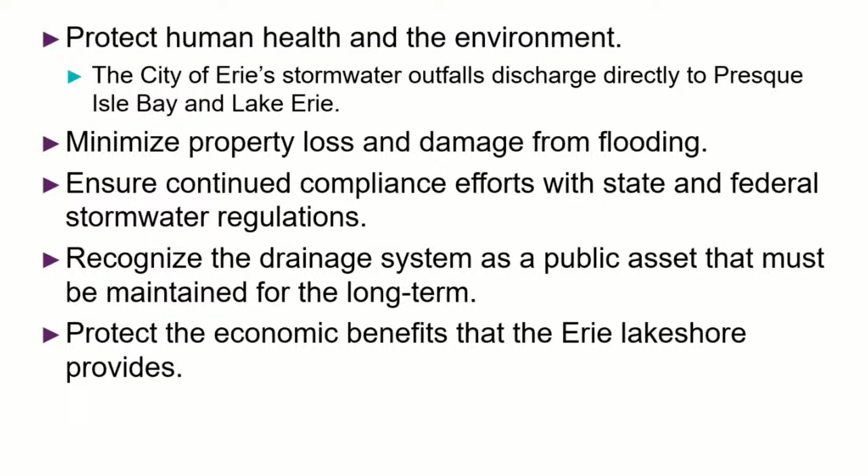Next - the big question we often get is, why now? What is driving the change at this particular stage of the game? There are really three points I want to make here. One is aging stormwater infrastructure.

The city manages a vast network of underground stormwater pipes - about 500 miles of stormwater pipes just in the City of Erie. If you put that end to end, you'd have a pipe stretching all the way from Erie, Pennsylvania to Knoxville, Tennessee. So it's pretty big. Not unlike a lot of other cities, Erie's system is aging - parts of it are over 100 years old. Even really good modern corrugated or reinforced concrete will only last about 100 years if properly maintained, so you've got a lot of infrastructure that is pretty old.

You have capacity issues, and so pipes that were built 100 years ago, 50 years ago, before good stormwater management, were typically smaller and not widened as additional development came on. So what happens is the stormwater backs up and causes upstream flooding, and deferred maintenance costs are more in the long term.

I wanted to highlight this briefly because it's a very important point, which is that managing by emergency is a lot more expensive than rehabilitating and fixing the system before a collapse occurs. Fairfax County, Virginia actually did a long study to look at the cost of maintenance over time versus the cost of what happens if something collapses. They found it was about 7 times more expensive to take care of something after it's collapsed. We validated those numbers with city staff using some recent projects and experiences, and the numbers were very similar.

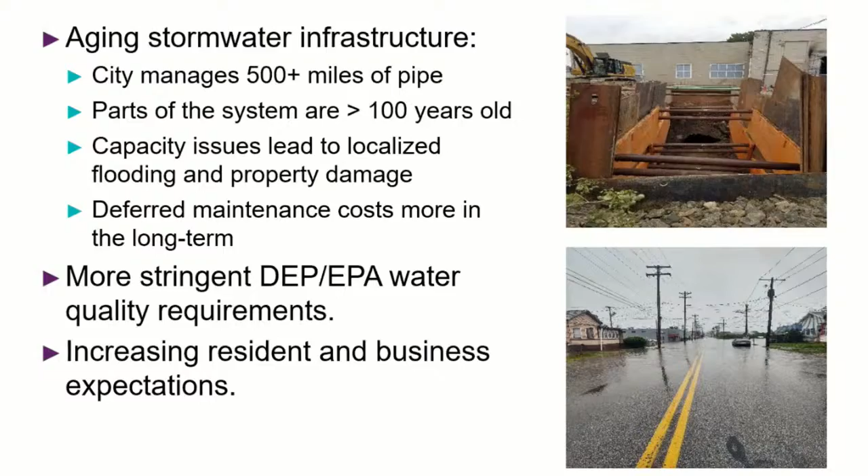More stringent DEP and EPA stormwater requirements - I'll talk about that a little more. And then also just increasing public expectations, both residents and businesses, with respect to not wanting to deal with spot flooding and stuff like that, and also in terms of the quality of the water in our local streams.

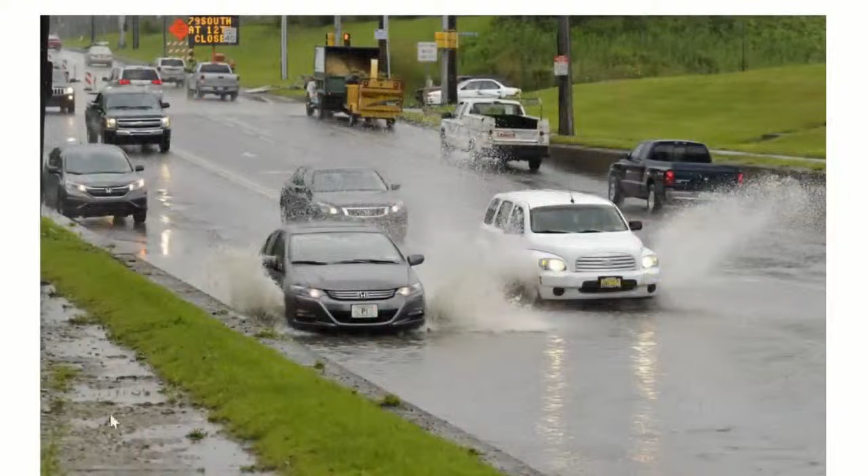So these are just a couple of examples here for Erie. This is road flooding caused by undersized infrastructure. This is West 12th Street - that's the kind of nuisance flooding you see that results from undersized infrastructure.

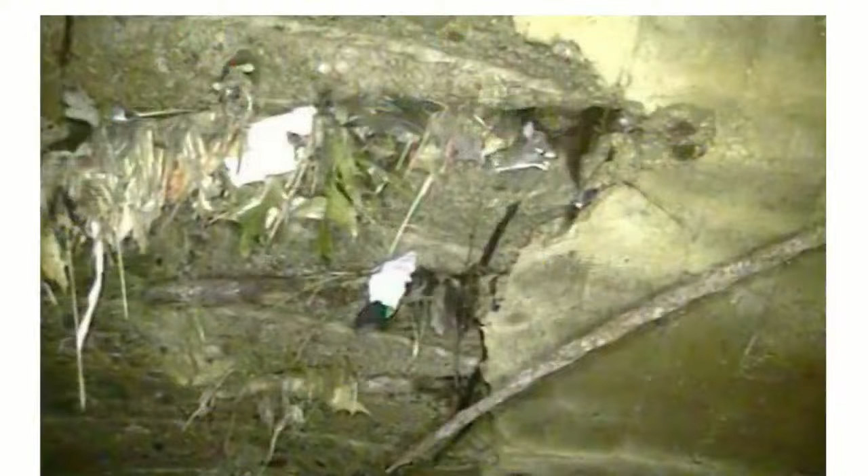This is a closed circuit television shot of deteriorated underground pipes under Myrtle Street. That's a great example - if you catch something like that early, it's relatively inexpensive to fix. If you wait for it to collapse, it's going to be a lot more expensive to fix.

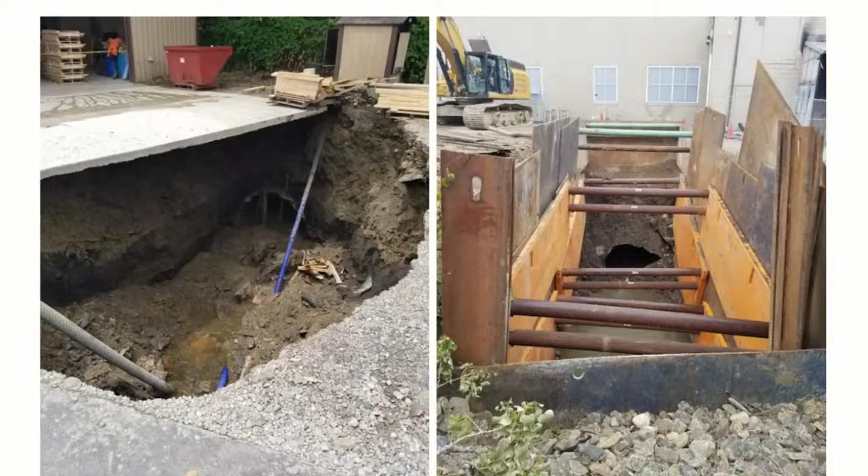So this is where you did have to deal with a collapsed structure, and of course that was expensive for the city to help manage.

In terms of the stormwater permit requirements - and this is important to remember because it comes back up with respect to the credit policy - the city is subject to a Municipal Separate Storm Sewer System permit, which is a state and federal requirement. It requires you to have a permit for any discharge of stormwater coming out of your stormwater outfalls.

What's changing about these permits is that it used to be much more focused on how you prevent an increase of pollution from new development. That's important and still part of your program. However, they're really shifting towards how you actually restore water bodies that have been impaired because you didn't have adequate stormwater infrastructure in the past. That's a much more difficult thing to do, because now you're retrofitting stormwater into your already built urban environment. That's more difficult, but that's the path DEP and EPA are on.

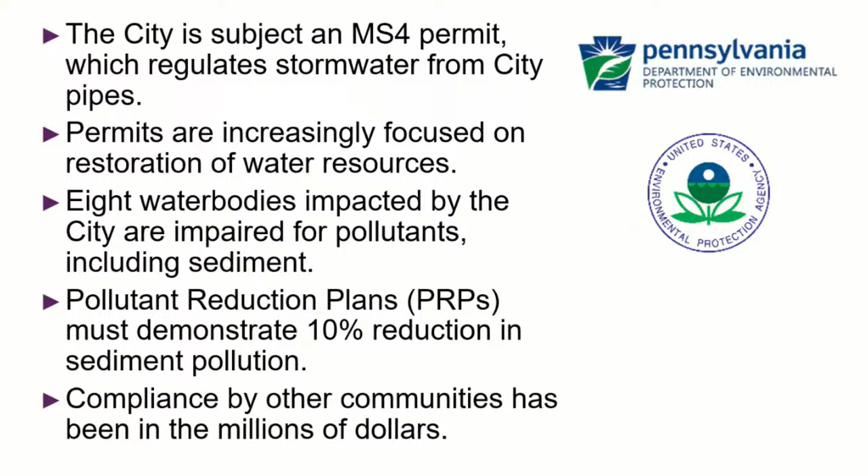The city drains 8 impaired streams and water bodies, impaired for a number of different pollutants including sediment. One of the requirements in your permit is the development of a pollutant reduction plan that must demonstrate a 10% reduction in sediment pollution from existing conditions in the city. 10% probably doesn't sound like a lot, but it is a lot when you consider trying to get that infrastructure into the built environment, and compliance by other MS4 permittees and localities typically runs in the millions and millions of dollars. I think that's the challenge you're also facing here in the city of Erie.

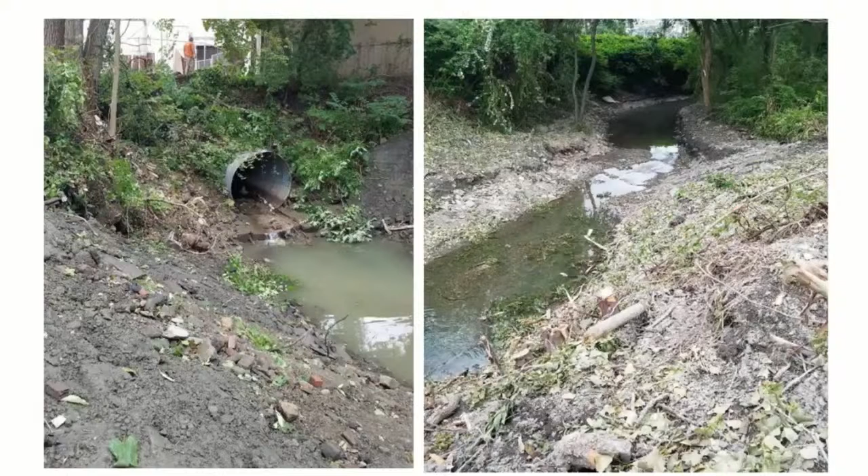This is an example of where some of that sediment comes from—blown out stream banks. As the volume and velocity of that water exceeds the carrying capacity of those streams, the stream banks erode and carry that sediment down into Lake Erie and your local streams.

One of the things about your pollutant reduction plan is that it relies a lot on stream restoration projects in order to get to those reductions. It's great because you're restoring your streams to a more natural state, but that is going to cost money to do.

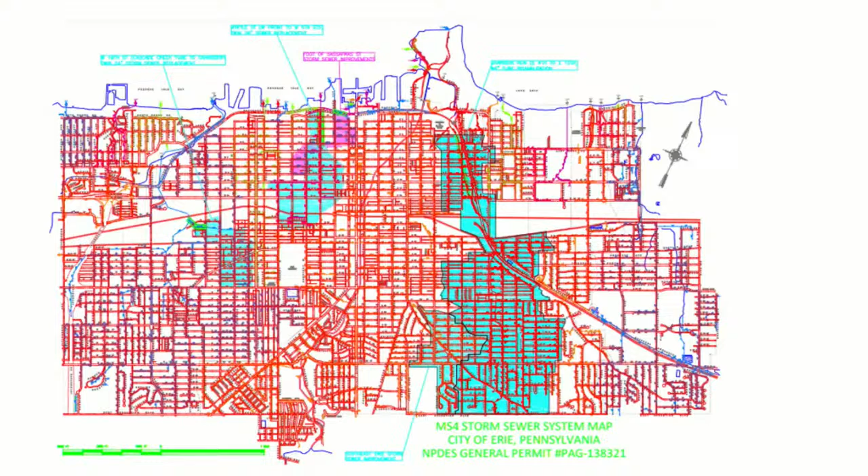Those are your light blue areas. The reason I wanted to highlight that is because it shows that while that's very important in terms of an infusion of money into infrastructure management, it really touches just a small portion of the city as a whole. Okay, next slide.

As far as the program that the fee will ultimately be supporting, this is above and beyond what you're currently doing—all new program. So $300,000 to $350,000 for operating costs, an engineer and field supervisor.

One of the things DEP and EPA are really focusing on is making sure your stormwater infrastructure is being maintained to its original design standards. It's a permit requirement, and in fact an ordinance requirement, that you actually have boots on the ground from city staff going out inspecting those. That's what Eric is here to largely do—get that under control and make sure this infrastructure that's been invested in is actually being maintained and serving its public purpose.

Another $420,000 to $480,000 is on planned capital costs, mapping, technology—public education and outreach is a growing element of these permits. The last bit is on future priority projects, including water quality retrofits as well as other things to maintain the system in good repair and rehabilitate it.

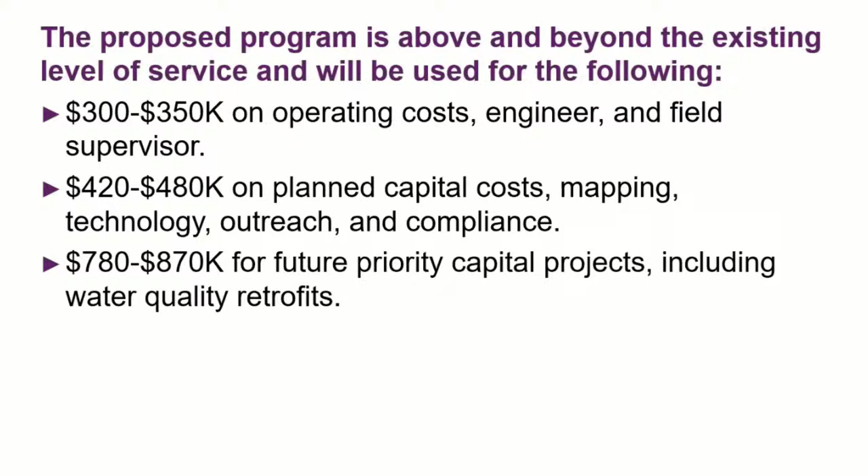So this is where the stormwater fee comes in as an opportunity. The basic question the city was faced with wasn't whether you needed additional revenue—you do. It's how those costs are going to be distributed among property owners within the city. That was the basic question the city faced in terms of how to raise revenue to invest in your stormwater infrastructure.

Next slide. So what is a stormwater utility? It's both a program and a fee for services—not unlike your wastewater fee, not unlike solid waste fees or water fees. But the idea is that rather than charging based on property value, fees are assessed on the impervious cover on a parcel. That's a nationally recognized standard for stormwater utilities and fees.

It's a recognition that there is a relationship between the intensity of development on a property and the need for a public stormwater management system.

So it has a couple of advantages—considerations when cities, towns and counties implement these. It's potentially a fairer way to distribute costs of services, because there's that relationship between the development on the property and the public program, which doesn't exist with just the value of the property. Everybody benefits from the program, so everybody pays. This is different than real property taxes where some people are exempt—here you widen the pie of who's paying, because everybody contributes some level of stormwater into the system and benefits from that program.

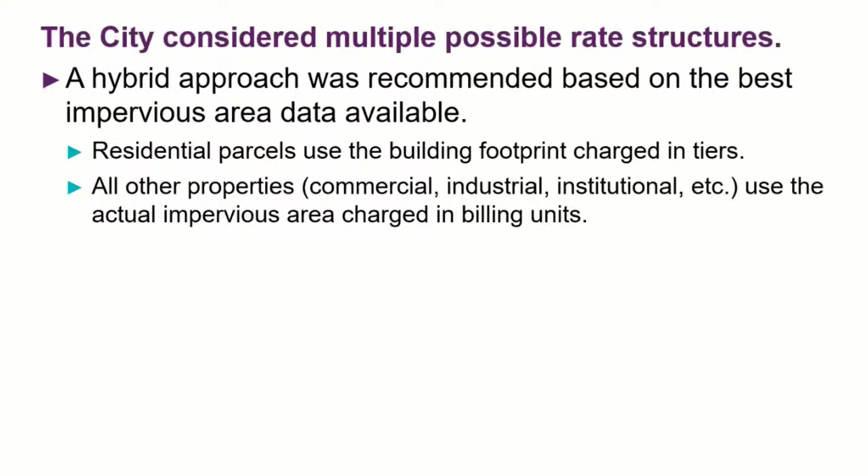So the proposed fee for residential is broken into 3 tiers. You have your small ones at $12 per year, medium at $24, and larger parcels or properties at $36 per year.

Then businesses, nonprofits and public entities too - one advantage is that state and federal government properties also have to pay into the system. They're charged in chunks known as billing units or equivalent residential units, traditionally set on the median impervious cover of a residential property, 2,136 square feet in Erie. The proposed rate at this point would be $24.

So if you have a property with 10,000 square feet of impervious area, divide that by 2,136, and round it to the closest whole number. That's 5 ERUs. They would pay $120 per year.

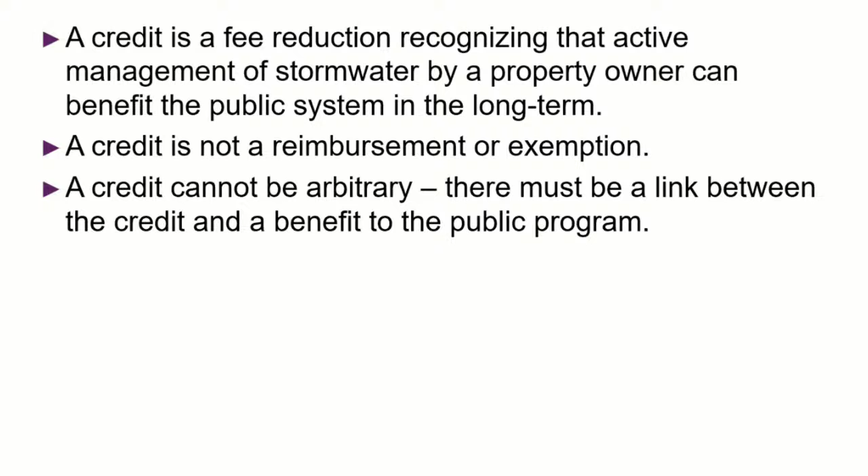But it's nice that you're able to recognize that this person over here has a stormwater management facility, this person doesn't, and so there's a difference with respect to their impacts on the system.

Just to give you a really high level idea of how that works: if you've got a property area of 10,000 square feet, you've got a fee that's based on 7,000 square feet of impervious area, so you're charging based on how much impervious area is on that property. Your stormwater practice treats 1,000 square feet, so your credit is based on that 1,000 square feet. It's not the whole property, it's how much impervious area you're managing with your stormwater management structure.

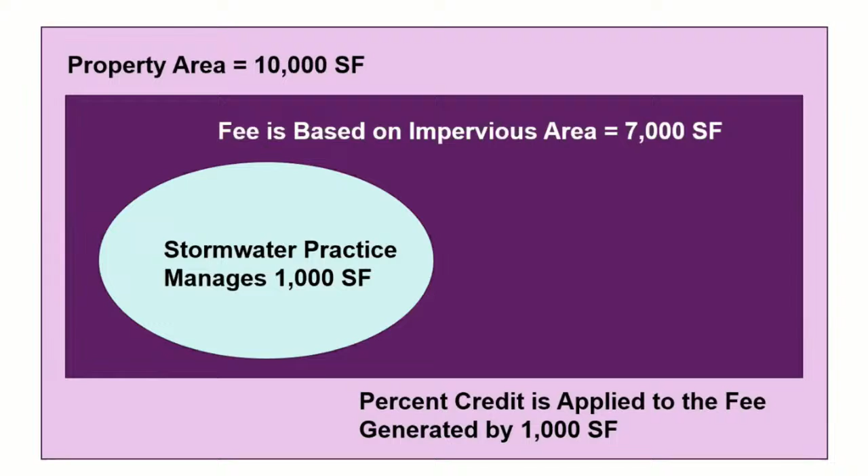So that's... yes, sir. On my property, what do I have to do to obtain credit? Do I have to build something?

Yeah, and actually we'll go through what is being proposed in order to be able to get that. But typically it is something that you do on your property that is physical, that manages or mitigates stormwater impacts in some way. Commercial properties, or is this available for residents as well?

Well, that was one of the things the advisory committee really looked at, and they are recommending a way for residential properties also to get a small reduction on their fees. So that was one of the questions that we asked: do we want to do that?

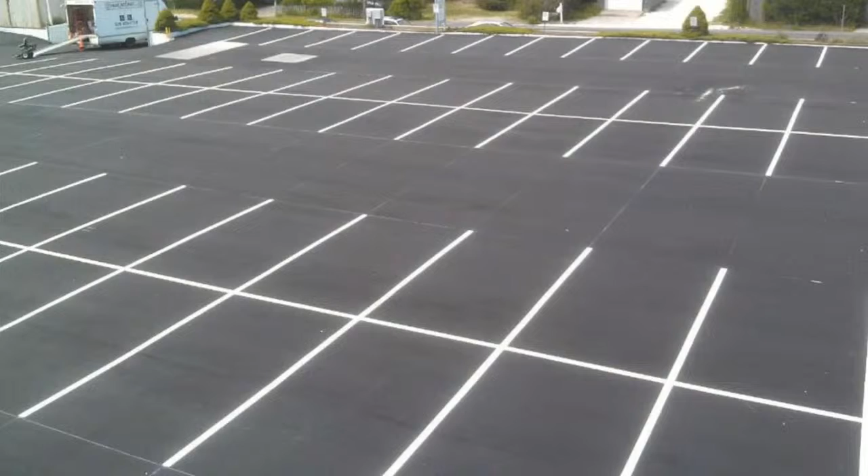Ultimately, I love these two slides because it's a really nice juxtaposition. A credit is a way to differentiate the fact that this brand new parking lot without any stormwater controls has a different impact on the city system than the next slide, which is a parking lot that has built-in green stormwater infrastructure. You can see there's a difference with respect to the benefit to the public system in those cases.

So the city put together a stormwater credit advisory committee, and I really enjoyed working with them. They were absolutely fantastic, and they really jumped in and became stormwater experts very quickly. They were charged with helping city staff think through key policy questions with respect to what makes sense for the city of Erie in terms of its credit policy.

It was a very diverse group of stakeholders on purpose, with a wide range of different backgrounds, and they provided invaluable feedback as we worked through those policy issues. We weren't able to reach consensus on everything - that's just not the nature of how things work - but we did listen, we did respond and react, and in a lot of cases we were able to come to consensus on a number of the different issues that are out there.

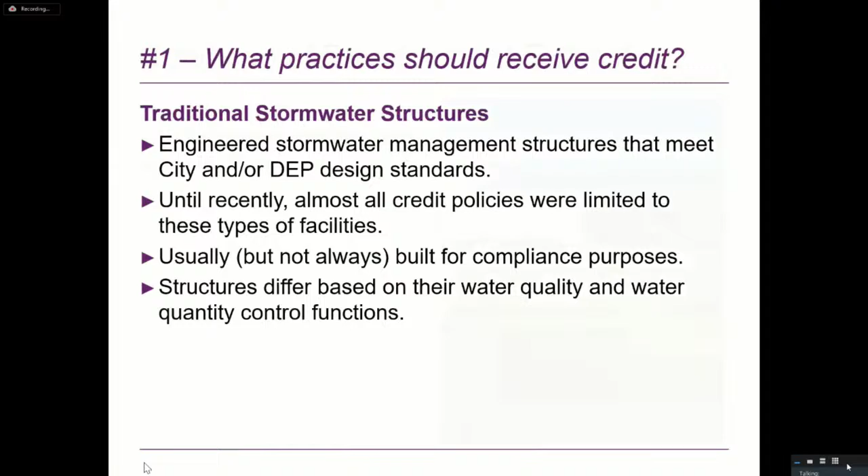Next slide. This gives you an idea of what they look like. This is a condition of development example, put in as a result of your Act 167 requirements. It's a new stormwater detention pond at Berman Bedding. So something like that could receive credit.

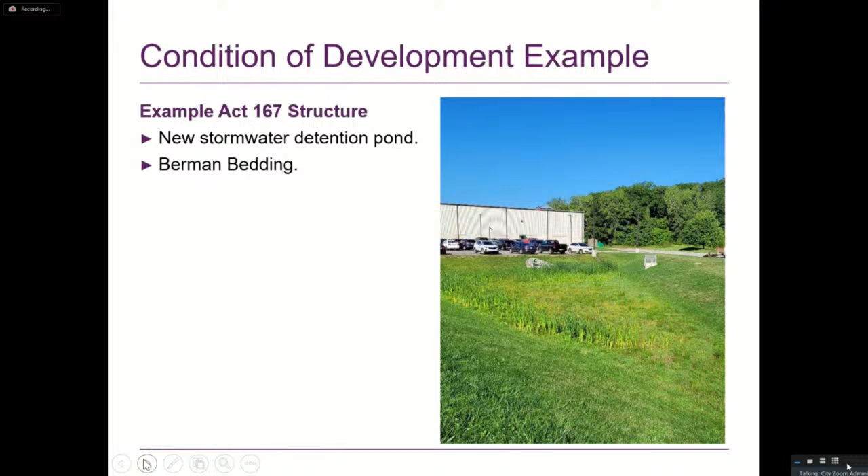This is also a condition of development - an underground infiltration system put in with the new Sheetz. One was above ground, this one you can put underneath a parking lot, but both put in for regulatory compliance with Act 167 requirements.

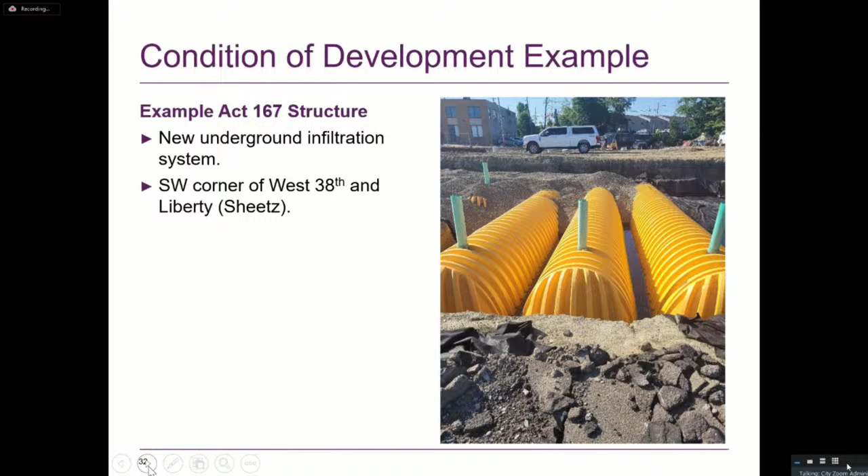This one's a little bit different. This is an example of something the Port Authority put in, called a snout oil water debris separator. Try saying that 3 or 4 times really fast. Whereas your other facilities were put in to control nutrients and sediment, these were put in to control hydrocarbons, trash, and debris. But again, you are actively managing stormwater, so something like this could potentially be eligible for credits.

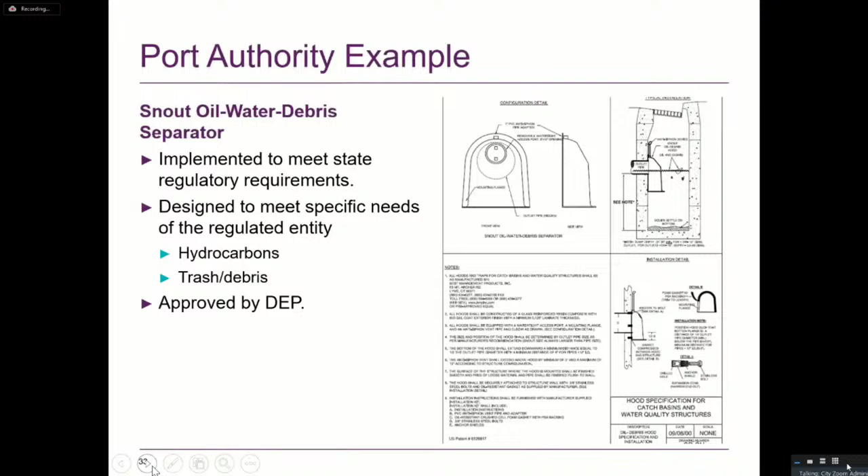The credit advisory committee actually came to some pretty good consensus on this. I won't say it was unanimous, but the overall sense of the committee was keep it simple. Traditional structures, they thought, should receive one level of credit. So notwithstanding whether you might have a bioretention facility that reduces a little more pollution than a detention facility, the idea is that they were all put in with compliance with regulations and mitigating the impacts of development in mind.

The exception is providing additional credit for a facility that achieves sediment reduction 10% or greater than what's required for regulatory compliance. The logic is that you're all under the gun to reduce your sediment by 10% to meet regulatory requirements. If you can get somebody to build their structure bigger to get additional sediment reduction, you get to take credit for that. That's a cost avoidance - that's actually worth something tangible to the city. So the advisory committee felt that in those circumstances, they should get extra credit.

As far as credit eligibility, again a little on the boring side, but it does have to meet technical standards. If you don't know what technical standard it's meeting, it's really hard to verify that it's doing what it's supposed to do. It's always subject to a maintenance agreement, which is required in your permit. Some of your old facilities might not have them in place, so making sure there's a legally enforceable agreement with the property owner that they're going to maintain it.

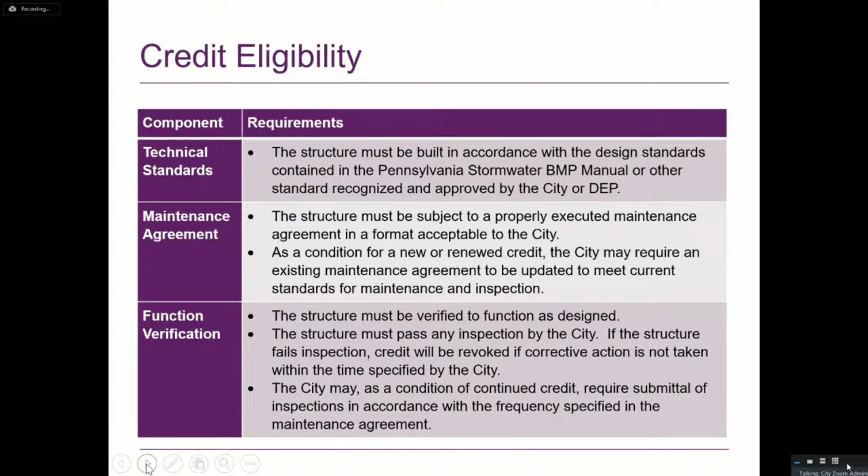And then also a way to verify that the structure is being maintained. If a property owner is abiding by their maintenance agreement, that verification isn't really tough, because that's what you're going to be doing year in and year out anyway. So those are your 3 things to be eligible for the credit: meet a technical standard, have a maintenance agreement, and be verified as functioning as originally designed.

The next one is how much credit should be received. This one's interesting because there was also a decent amount of consensus from the advisory committee. It does have to be linked with a benefit. That benefit can be quantitative or qualitative, as long as you're able to articulate why it is that you provided the credit.

The benefit of those structural controls put in for regulatory requirements is mostly to mitigate flooding and water quality degradation from the property. So it doesn't impact maintenance of your existing system, doesn't impact the fact that you've got to go back in and make sure those pipes are structurally sound.

When you take a look at your future programs, not just your immediate needs but what you're doing in the future, about 25% of your future focus is on improvements that could be influenced by one of these stormwater structures, as opposed to maintenance and rehabilitation, which has to happen regardless of what is occurring on your property. That 25% was kind of your key marker for what makes sense as an initial credit for a stormwater management structure.

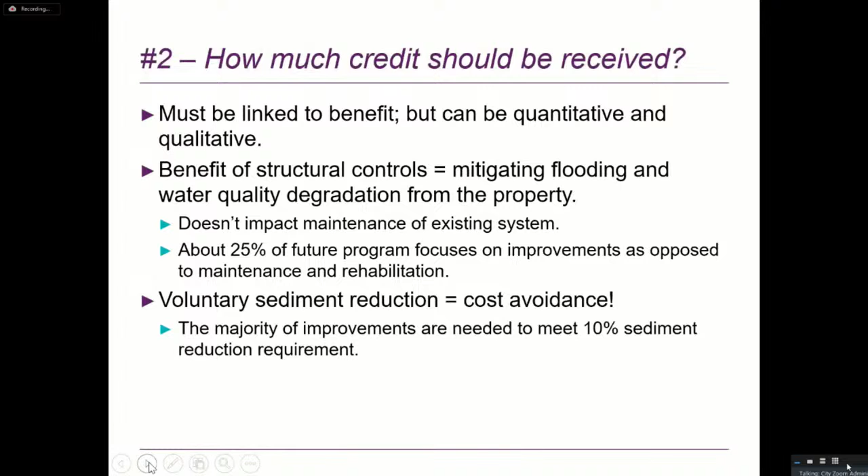In terms of voluntary sediment reduction, that's cost avoidance. A lot of what you're spending money on in the future, that 25%, is going to be on water quality improvements. So we use that as our key benchmark for what this was worth to the city's program.

So that's what we came up with: 25%. If you have a structure in place that meets those technical standards and you're maintaining it, you get 25% credit. If you expand or enlarge it to reduce sediment by more than 10%, you get a 20% bonus on top of that, so your total possible credit on your bill would be 45%.

If you look at what other localities in Pennsylvania have done, we fall squarely within that particular area. Bethlehem has a low of 35% as their max, while Allentown, Bradford, and Easton go up to 50%, so it puts us right in that range. Any questions on that?

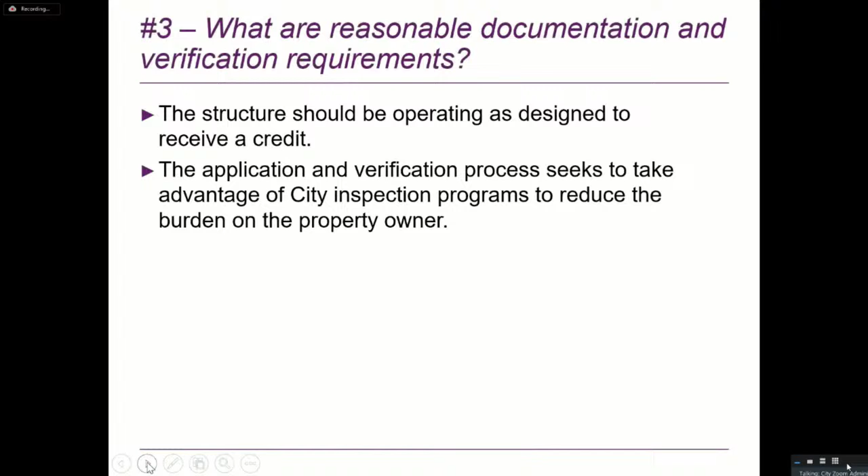With regard to reasonable documentation and verification, you need to make sure it's operating as designed. We have Eric out there who will validate whether something is actually operating as designed. As long as a structure passes a city inspection, you're in good shape. The application will require you to show that you've maintained it, and from then on, as long as it continues to pass city inspection, you should be good to go. That's actually a benefit of this, that these structures should stay in good shape.

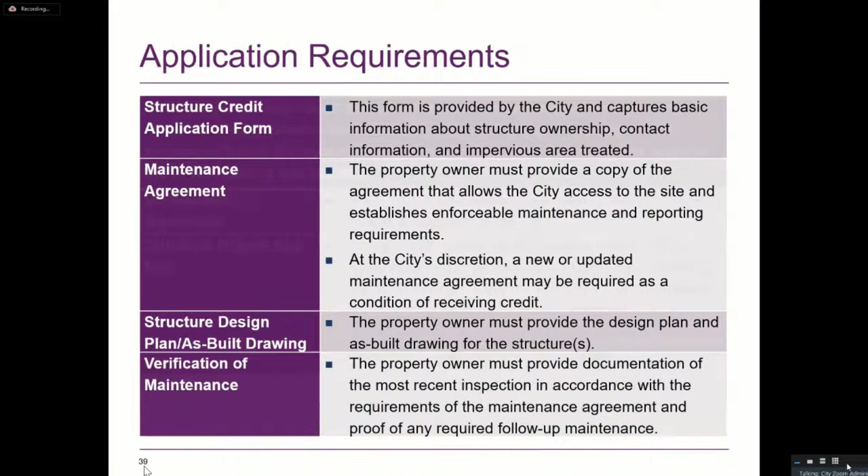There will be an application form, and we've tried to keep it really simple. We'll go through it at the very end. You need to submit your maintenance agreement, your as-built structures, and proof that you've maintained it. Those are the things that would be in your application package. If you don't have those things, city staff will try to find them.

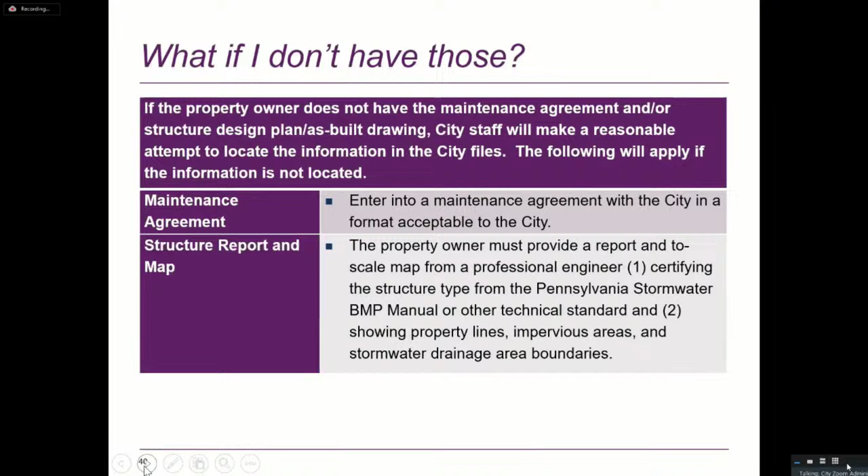If they cannot find them, you then need to enter into a maintenance agreement. That's pretty simple. Then you have to come up with at least some kind of structure report and map that shows, through engineering, here's the structure, here's what kind it is, and here's how much impervious area it drains, because that's what your calculation will be based on. It has to be certified by an engineer.

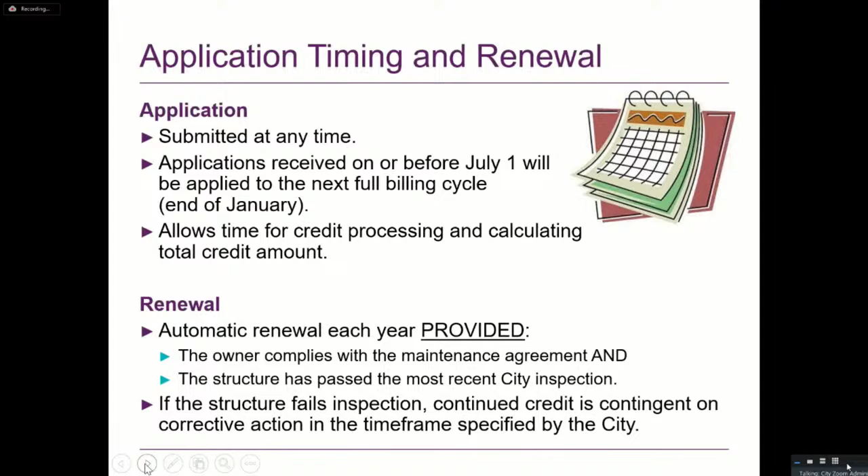As far as applications, they can be submitted at any time as rolling applications, but any application received before or on July 1st will be applied to the next billing cycle. Billing cycles are proposed to start in January, so anything in the door by July 1 gives the city enough time to verify the application and confirm everything is in good order before applying that credit to the next billing cycle. Renewal is automatic, provided it passes city inspection. If it doesn't pass, the city will say you've got X number of months to bring it back up to standards, or else you ultimately lose your credit.

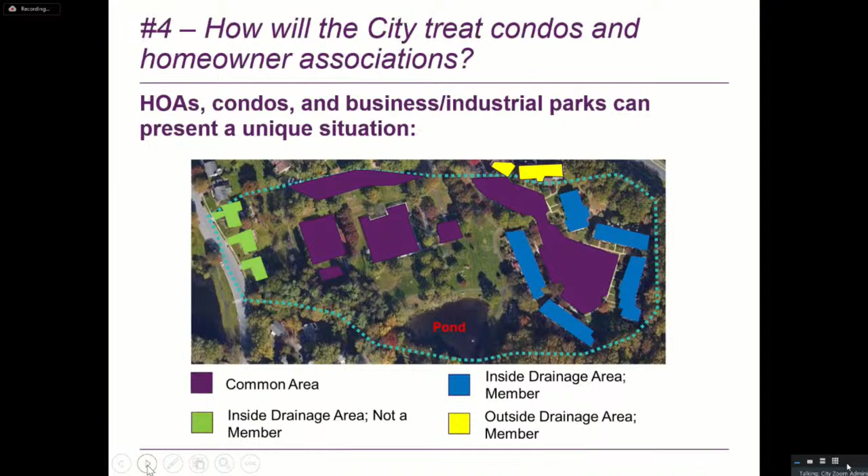The easiest way is to have the association that owns the structure go ahead and pay the entire fee for the association. They look at the association boundaries, how much impervious area is within it, and then they get to take full credit for that stormwater management facility. It would be something that they would decide they want to do.

It's a way to maximize the credit for their members, but they would be responsible for taking in the whole bill. They would then get the credit, and then they would decide how they wanted to distribute those benefits back out to their members. So it would be an internal thing. The city could say, it's up to you guys how you want to go ahead and do that. But it's a clean, easy way of dealing with a complicated situation, which is let the HOA figure out how they want to go ahead and deal with those costs and divide up the benefits of the credit.

Question? Yes, sir. Will this apply to authorities? Port Authority, Water Authority, Housing Authority? It applies to everybody, yes, sir.

And it is a fee for service, right? And so similar to other ones where we've got fees, they also have to go ahead and pay. It's also instrumental in that if the city or any locality starts to exempt their own properties or other public properties, they could go ahead and say that it's arbitrary, and they wouldn't have to go ahead and pay under state and federal law. And so it's kind of an all-in approach. And would that also apply to 501c3? Yes, sir. Yes, sir. Yep.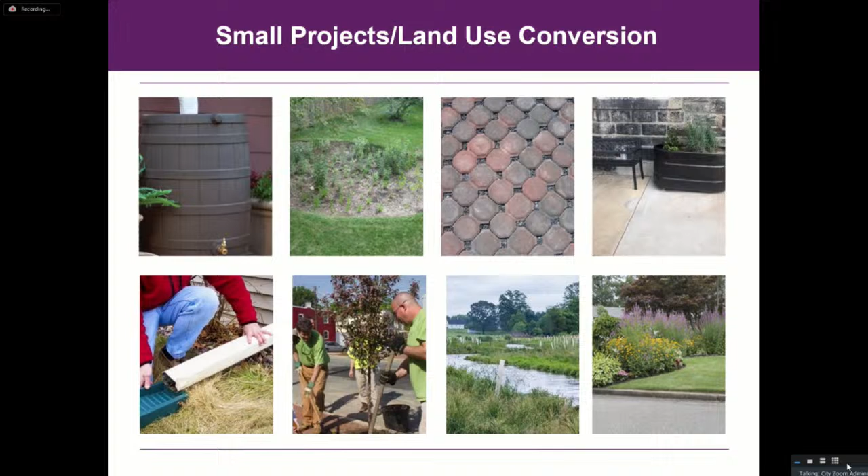So those are small projects converting land uses. The next one are pollution prevention activities. So street sweeping, pet waste stations have been used in some localities. Nutrient management, or even just getting out there and volunteering in the community. There's been a couple of ones where, if you volunteer a certain number of hours, you can get a credit off those. And so again, we looked at kind of that toolbox.

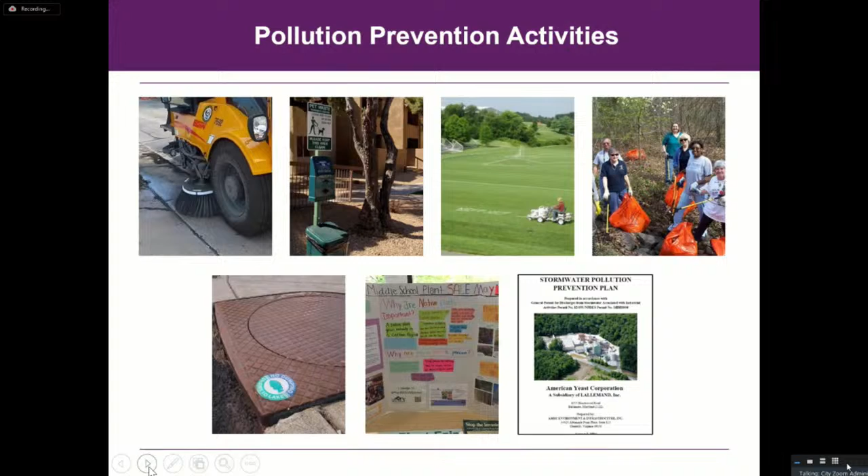We looked at the pros and cons. We looked at the benefits to the city. We looked at the administrative burden. And what the advisory committee really kind of honed in on was that they largely agreed that everybody should have some opportunity to be able to reduce their fee. However, they really wanted the practices to be substantive and have a real impact. And they were also very cognizant, and I know city staff was very, very happy to hear this, of the administrative impact on city staff in terms of managing these things.

The other really big discussion the advisory committee had was the fact that you're applying a credit to a fee that's already very low. If you're paying $12 or $24 or $36 per year, you're not likely to install something based on an economic benefit. I want to be a good steward, and this is a way to recognize that, even if it's a very small fee or a small credit.

So there were two practices that rose to the top: rain gardens, and then infiltration trenches and dry wells.

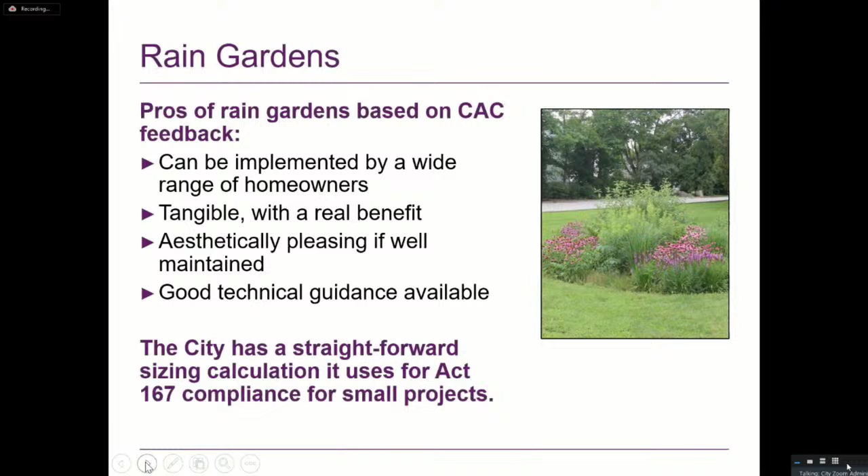The pros of rain gardens are they can be implemented by a wide range of homeowners. They do have tangible benefits—you just can take credit for them—but they are a demonstrated water quality technology. They can be aesthetically pleasing if well maintained, and there's lots of good technical guidance already out there, so we're not reinventing the wheel. In fact, the city has a straightforward guidance policy already in place to calculate how big your rain garden needs to be for a certain area.

In case you're not familiar with rain gardens, they're basically like a giant sponge in your yard. You dig out the existing soil, which is usually pretty hardened in an urban environment, and fill it with a soil media of mulch, sand, and other things that let water soak into it. It stores water until it can soak into the ground, reducing the amount of runoff from the property and allowing pollutants to filter into the ground.

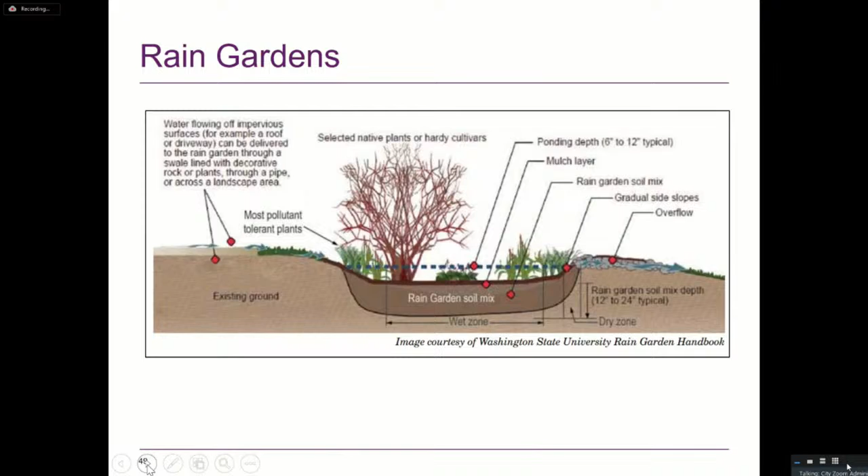Dry wells and infiltration trenches are very similar, except instead of filling them with soil and planting on top, you fill them with different size gravel and sand and put a geofabric around it. The nice thing about these, even though they're not quite as aesthetically pleasing, is you can fit them into narrower spots or tight spaces, like the edges of driveways and small parking lots. The city also has sizing calculations that let a property owner easily decide how big one of these needs to be.

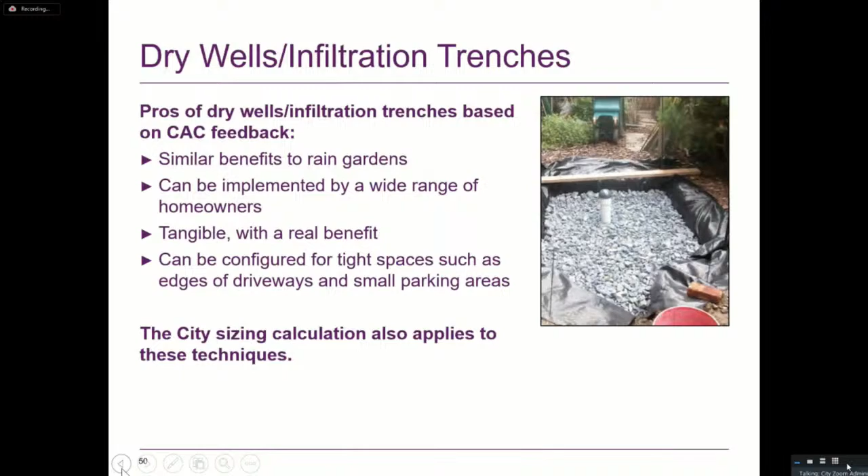Yeah, that's good. Looks like it's a final product. Actually, I'm not going to do this. Yeah, well, it would be cleaned up a little better than that. But generally you're going to have gravel on top, and they can be round like that, or really narrow. So that's basically what they look like.

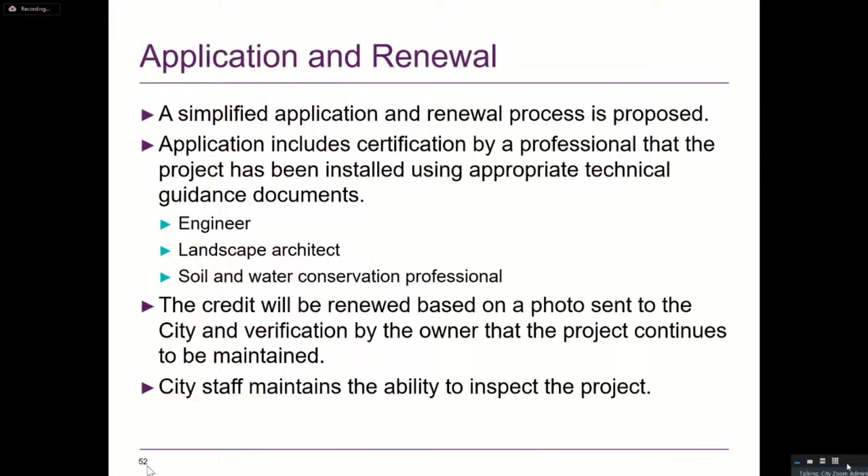So I think this is the last question we had: should the total amount of credit be capped each year? In the proposed budget, there's $50,000 put in for credits. The concern was, what if everybody came in and you had $200,000, $300,000, $400,000 worth of credits coming in the door? All of a sudden your whole program is being done through credits and not going to the program. Now, based on experience, that's likely not going to happen—a lot of people aren't going to apply, it's not worth their time and effort. But there was a recognition that we wanted a little bit of a fail-safe to ensure we were keeping within budget in terms of credits.

This is something we borrowed from Meadville. Their credit policy basically says that if your total amount of credit approved for a year exceeds the amount set by your city council and budget, then everybody's credit is reduced by a prorated amount. So if your cap is $50,000, but your total credits for the year come in at $70,000, everybody has to reduce their credit by a small amount in order to keep under that $50,000 mark. By and large, the advisory committee understood that logic and supported it, just to make sure we were focusing the program on the infrastructure.

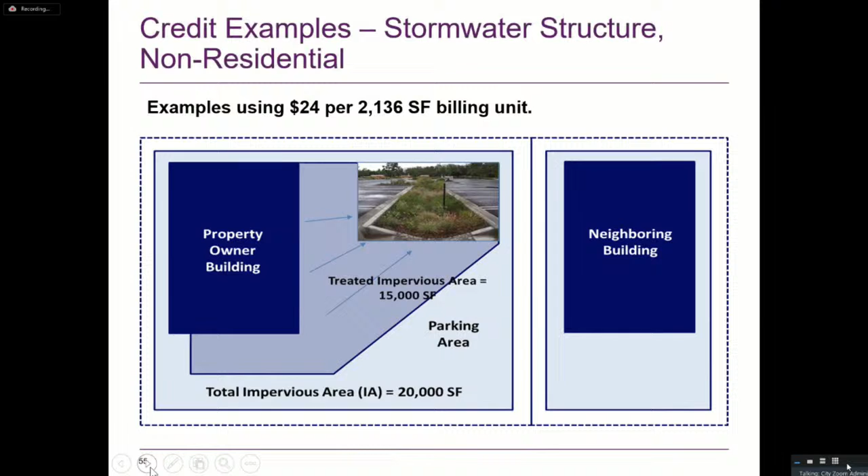For the first example, next slide: let's say you just got a regular old humdrum facility, put in for regulatory compliance. You get 25% credit. Your original fee would have been $216, and your reduced fee is going to be $175.50. That gives you an idea of the order of magnitude for something like that.

Next slide. In this case you got your base credit, but this person oversized their facility a little bit in order to get that 10% reduction in sediment above what was required. So they get that extra 20%, for 45% credit on the treated area. That goes from $216 to $143 per year. So now it's starting to add up into real money.

Next one: something we didn't talk about, but is in the credit policy, is that you can take credit for off-site treatment. A lot of times you'll have a stormwater structure that treats water from your property, but water, like air, doesn't necessarily respect parcel boundaries, so you might be treating something from your neighbor. That's again a benefit to the city, so we said you can take a credit for that up to a maximum of 45%. In this case, you got a base credit facility, but you're treating impervious area from a much bigger area than your property, so you get to take that 25% credit but for more impervious area. In this case, you'd go from $216 to $162.

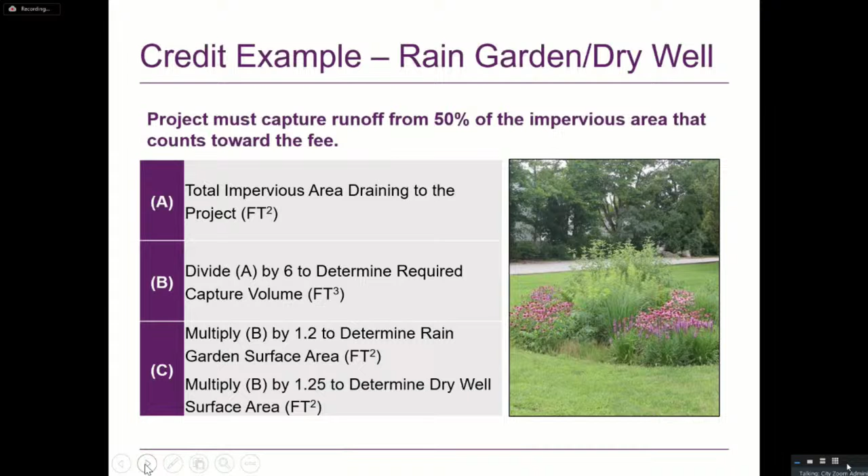Here's an example of your rain garden. We had to pick a threshold—you can't just plop a rain garden in a yard the size of this table and decide you're going to take the credit. There's a sizing criteria: 50% of the runoff coming from your building footprint, a relatively simple calculation to figure out how big that rain garden needs to be. If you've got a 1,000 square foot residential building footprint, that's your tier 1, your rain garden would have to be approximately 10 by 10 square feet in order to get the credit, and you would get $1.20 on your thing. So again, remember, labor of love, labor of love.

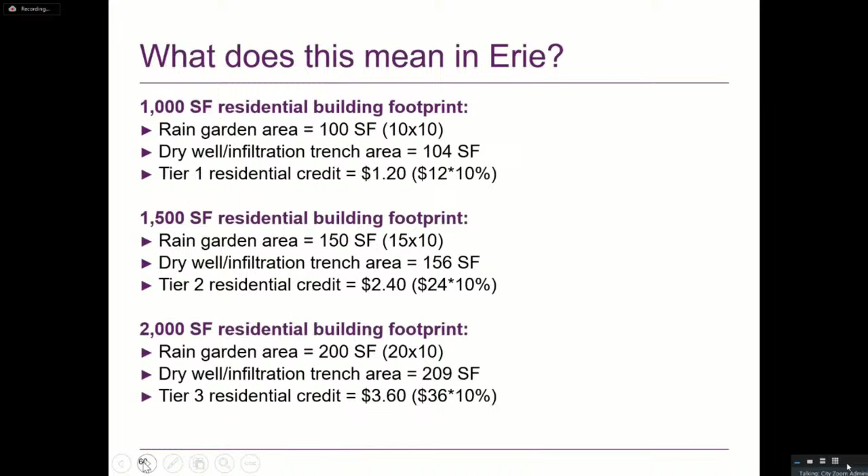Your middle tier, so that's going to be about a 15 by 10, so you're going to get $2.40 off, and for your upper tier, that would be about a 20 by 10 size rain garden, and then you get $3.60 off of that.

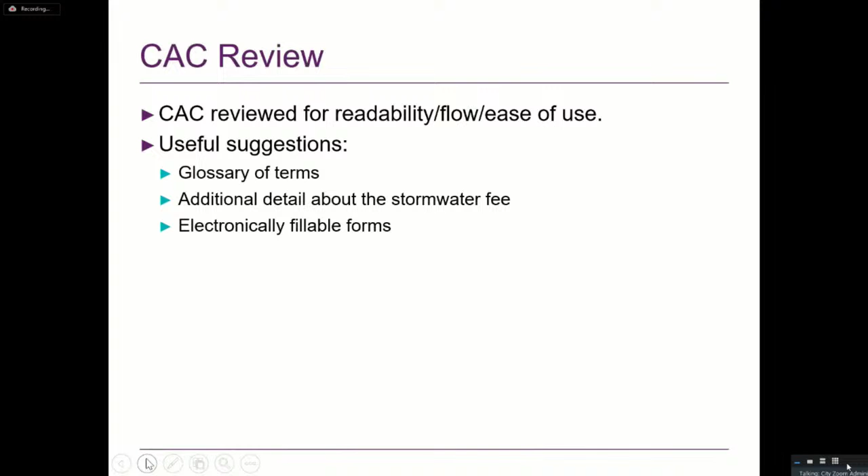So just to wrap it up, for the credit manuals, we didn't need to reinvent the wheel. Every one of those programs that we looked at also had manuals, so we combed through there and looked through what we liked, what we didn't like, as far as readability and flow. We put all those together and tried to come up with something that made sense for Erie. The advisory committee reviewed that and came up with really good suggestions in terms of readability, adding a glossary of terms, some additional detail about how the stormwater fee is calculated, and some electronically fillable forms to make it as convenient as possible for somebody to do that application.

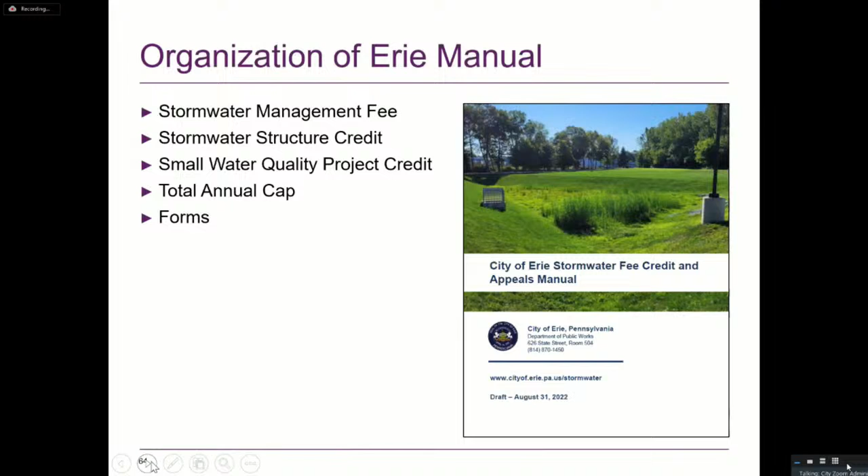It's organized around a couple key concepts: what is the fee, what is the credit program, how do you get it for structures and water quality projects, the annual cap, and then the forms. And these are what your credit forms look like.

So, the appeals process. Not a lot of discussion about this because it really is captured in the proposed ordinance, and usually they're very straightforward. In terms of reasons that you can appeal a stormwater fee, they're relatively limited. You say I don't have that much impervious cover on my property and want to challenge that, or I think this credit was misapplied, or I didn't get a credit applied to my property and I thought I should, or this is sent to the wrong person, or this isn't my property. So all relatively simple stuff.

But they just need to be submitted and appealed before May 15th. They go to City Public Works to go ahead and review that. They've got 30 days to go back, and again, a really simple appeals form. It's pretty straightforward usually; once city staff looks and sees it, they can do the forensics of impervious cover and all those kinds of things.

All right, so just to really summarize, the advisory committee provided really great feedback, really appreciate their work on that. It's a pretty straightforward approach: 25% credit for structures built to DEP or city specifications, additional 20% for voluntary sediment reduction, for a maximum of 25 or 45%, which is generally in line with other localities. There is an opportunity for all property owners to be able to get some kind of credit with regard to rain gardens and infiltration trenches. We've tried to also keep it simple by taking advantage of the city's inspection program for the verification process so that the property owner isn't having to do redundant processes.

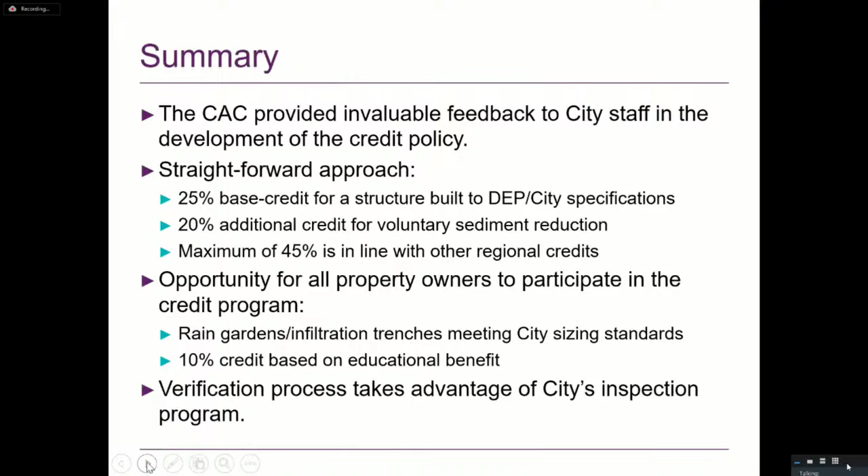And that's it. Very happy to take any questions.

Okay, I have a question. Yes, sir. We talk about the footprint in the billable units. Like obviously for most single-family homes, we're using whatever the actual square footage is. Is that right? So for single-family homes, you're using the building footprint only. It's too complicated, at least right now, without spending a lot of money to try to make sure we're capturing every patio or every shed. So it's just your actual building footprint that we had really good information on.

Okay, so a couple questions without complicating things. Say I have a tri-level — theoretically speaking, I would have a smaller footprint than someone who lives in a ranch with the same amount of square footage. And from a commercial side, if I have a 10-story building that's 100 by 100, would it be getting the same rate as a person who has a million square feet of impact? I wish I had brought my example from the city of Rockville, Maryland, because it's a really good example. But you're absolutely correct — the more efficient that you use your space, if you've got a property, whether commercial or residential, that spreads out and has lots of impervious cover where you're going to generate stormwater runoff, they're going to pay more than a property that's more efficient, so that your footprint is smaller and you go ahead and build up.